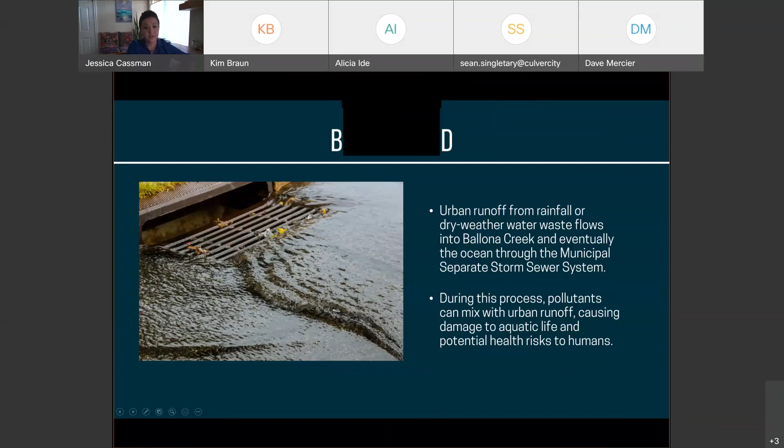And when we talk about stormwater quality or stormwater runoff, what we're also talking about is urban runoff, which results from dry weather flows from things like washing cars and overwatering, but water from these activities makes the same way to Ballona Creek and the ocean just in dry weather. And the pollutants that it picks up along the way are conveyed into the receiving water bodies, and then they become a risk to human and animal life. And it's because of this that stormwater runoff is regulated, like Kim said, from the federal level all the way down to the local level, to protect public health and the environment.

So most of Culver City, as you can see here, lies in the Ballona Creek watershed. The cities and portions of LA that discharge into Ballona Creek are not allowed to cause or contribute to the impairments of Ballona Creek. And so the permit that regulates the discharge is called the MS4 permit, the municipal separate storm sewer system permit. We can think of this as the storm drain permit, but it is part of the National Pollutant Discharge Elimination System permit program.

So what is an impairment, how can we make sure we're not causing or contributing, and how can we show that we are in compliance with our permits? These are all really great questions with a lot of different answers, but all of the cities and portions of LA County within the Ballona Creek watershed came together, asked those same questions, and formed the Ballona Creek Enhanced Watershed Management Program, the EWMP. And the study they did on behalf of the watershed was meant to simplify what it means to comply.

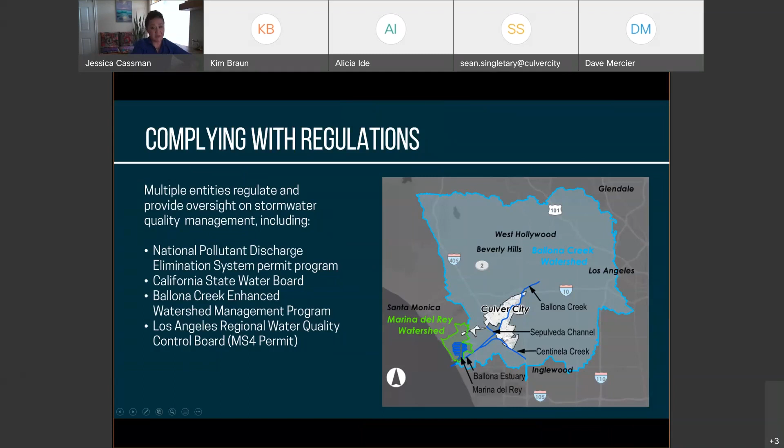And the study determined specific compliance targets for each of the cities and portions of LA County that are members of this watershed. And they determined that if each of the cities meets these compliance targets, they can be reasonably assured of complying. What that means is that for Culver City, the compliance target was set at 99 acre-feet of stormwater volume. So this means that if the city can manage 99 acre-feet of stormwater during a rain event, they can be reasonably assured that they are complying with their permits.

And so the first type is going to be the infiltration BMPs. And what these do is they capture water for infiltration to the ground or groundwater sources. We can also use capture and reuse BMPs, which capture the water and then reuse it for things like irrigation or indoor plumbing or another beneficial use. And then the last type would be treatment BMPs, which capture the water, treat it to a certain water quality, and then release it back into the storm drain system.

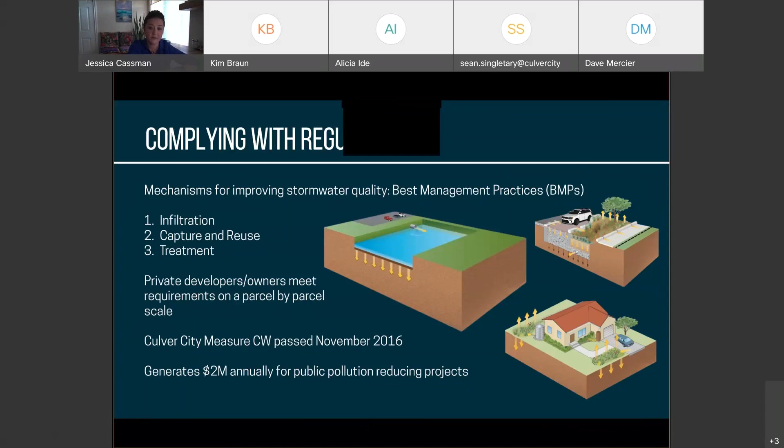And the MS4 permit does require that private developers and owners also implement BMPs on a parcel by parcel scale. But Culver City voters passed Measure CW, which is a parcel tax meant for publicly funded pollution reducing projects, in November of 2016. Some of the ways that the public funding can be used is to keep things like storm drains, streets, and catch basins clean. It can also be used to provide education and outreach activities. It can be used to construct projects, and it was used to develop the Stormwater Quality Master Plan.

Culver City has already done a lot of things to make great progress towards that 99 acre-feet. The Washington Boulevard project is currently in design, set to start construction in January of 2022. This is a public-private partnership with Costco, and it enabled the city to meet its regulatory obligations for the Marina Del Rey watershed. So that's kind of why this Stormwater Quality Master Plan only addresses the Ballona Creek watershed. Culver City is already taking care of what they need to for Marina Del Rey. And as you're probably familiar with, this Culver Boulevard project is currently in progress, and it accounts for a good portion of that 99 acre-foot target.

Both of these projects really came and materialized out of convenience. The partnership with Costco was an opportunity the city recognized as it was in development. And then the Culver Boulevard project, I think, was meant just to be a realignment project, but the city said, hey, wait, we've got this other regional project that if we combine them would be really efficient. So going forward, the city was interested in making more of a formalized plan to take advantage of these types of efficiencies easier and more frequently.

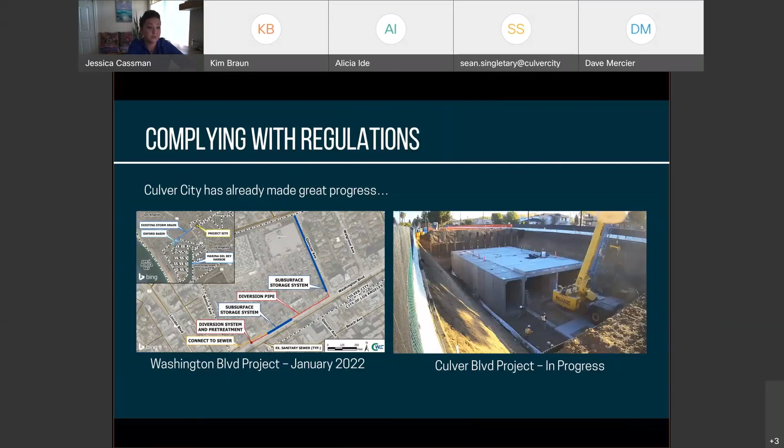And so that formalized plan is the Stormwater Quality Master Plan. Like Kim was saying, it does provide a pathway towards compliance that is specific to Culver City. It provides some decision-making tools about which projects to move forward, some funding strategies, and probably will become some type of regulatory support. And it's also a good starting place for community involvement.

So to start off, the Stormwater Quality Master Plan analysis overlaid a lot of city-specific data. So a lot of this data included soil type, groundwater depth, topography, parcel ownership, and in this way we could find potential project opportunities. It was also used to determine what types of BMPs or projects were best suited for which location. And in total, 441 project opportunities were identified, and that makes up about 69 acre-feet of potential project storage in the public right-of-way.

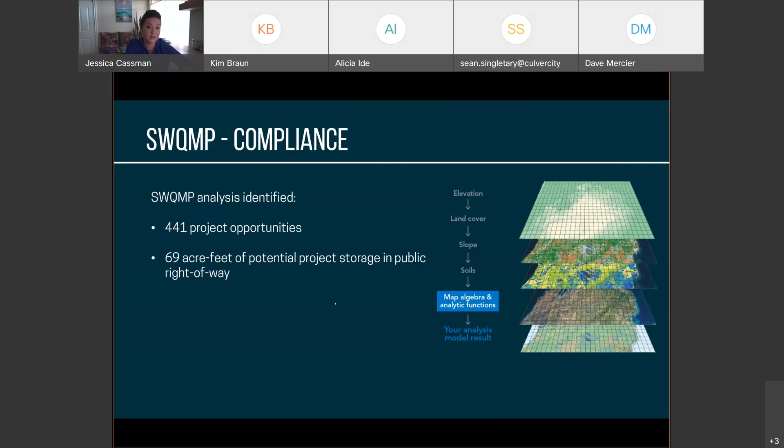After all the projects were identified, we took the projects and ran them through a prioritization matrix. Using site suitability, multi-benefit, and capacity metrics, we were able to give each project a score. And in that way, we could compare projects to other projects, even across the different types of BMPs. We identified 10 regional opportunities. These are larger scale, comparable to the Culver Boulevard and Washington Boulevard projects. Since they're larger, these were mostly located in open spaces within the city, such as parks and schools.

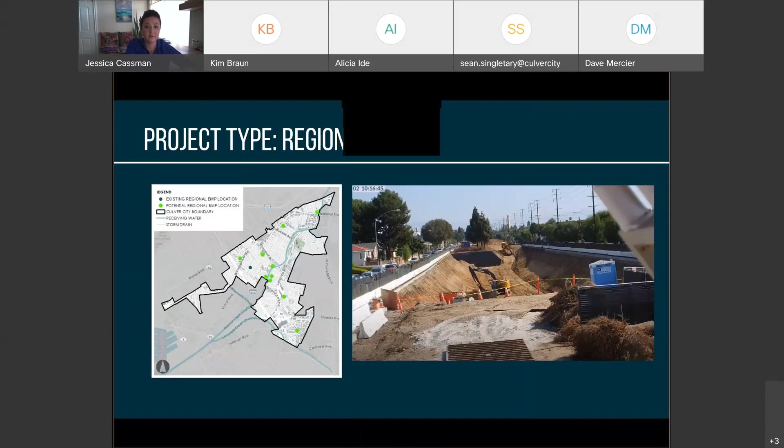We also identified 297 Green Street type projects distributed throughout the city, and these would be linear projects located along the streets in the parkways, sort of like what you're looking at here to the right. And these are really grouped by streets and neighborhoods. So there are 297 groups of these Green Street type projects.

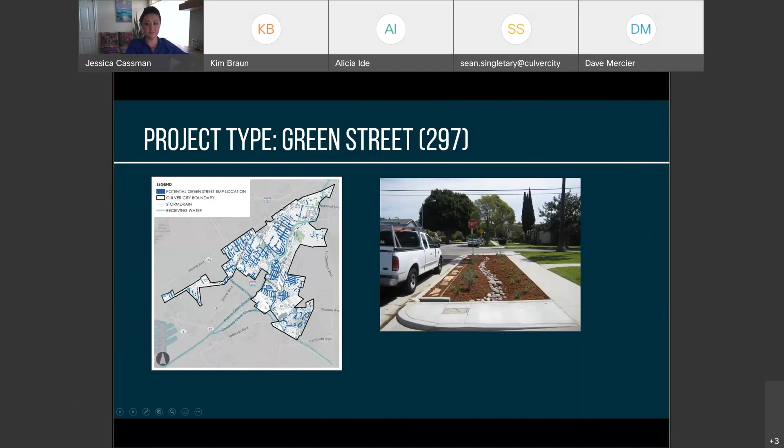And the last type we were looking at were low impact development projects. We found potential projects, 134 of them. In the context of this master plan, we're mostly talking about dry wells. And dry wells are manhole structures with holes in the sides and in the bottom that allow water to be infiltrated throughout the soil profile.

And these are great because they are pretty compact. They don't cause a lot of disturbance. They are fast to implement. They're very cost effective in terms of how much water they can manage, but they are restricted by the soil types and the groundwater levels below.

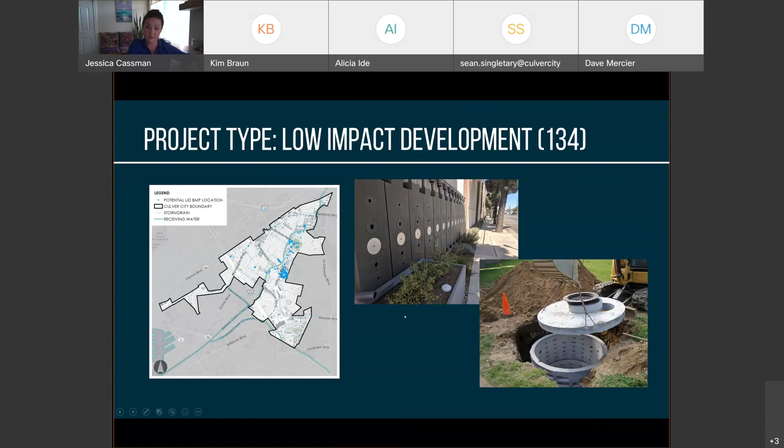So the 441 opportunities that we found were estimated to cost about $140 million. With Measure CW, the Culver City parcel tax, and the LA County Measure W funds, we have about $2.7 million annually for projects. So doing the math, that could take up to 50 years to construct the projects.

And so to make progress, the city would need to determine which are the best projects to move forward and which should be prioritized. And to give the city flexibility, there are a couple of different ways to do that. One prioritization was based on cost efficiency. So which are the best projects to move forward that would fit into the available budget?

And another way would be to determine which are the biggest projects that would get the city to compliance fastest. And then the multi-benefit prioritization identifies the best projects to be competitive for grant funding. Lastly, the interactive dashboard tool can help the city plan internally with other departments to find those efficiencies with co-locations of private developments or other capital improvement plans.

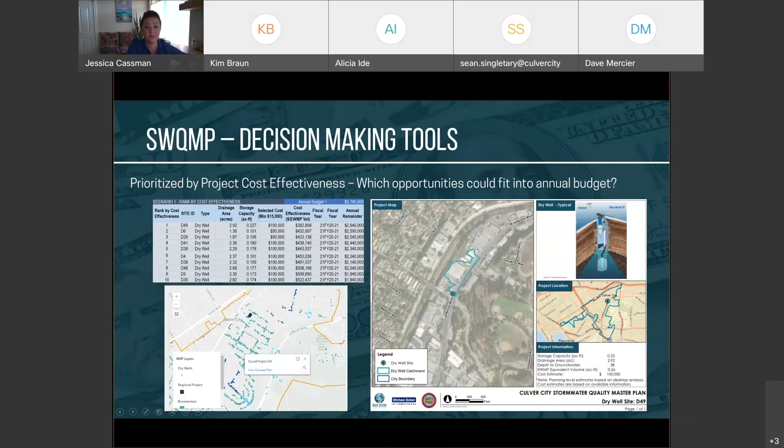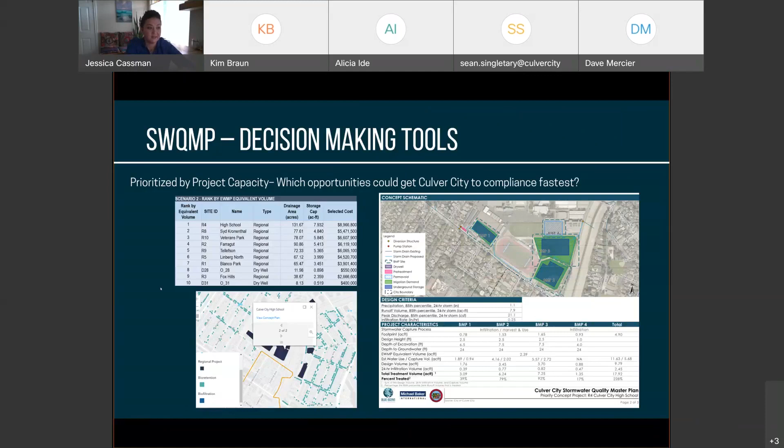We looked at if the project would benefit the Urban Heat Island Index, or if the project was co-located with a known or proposed project within the city, or if it would be helpful in reducing localized urban flooding.

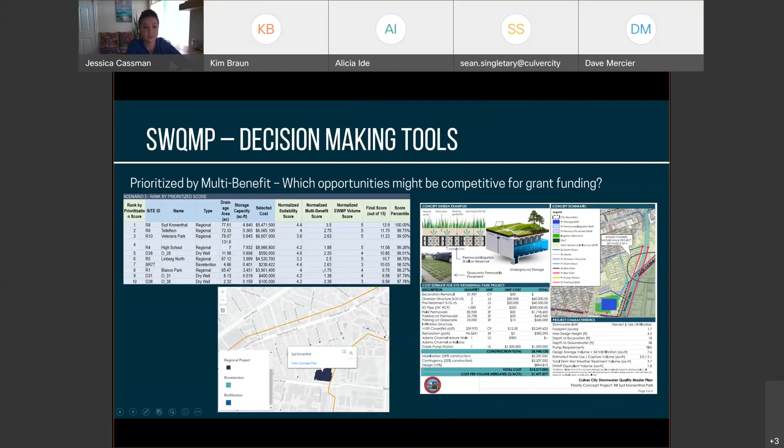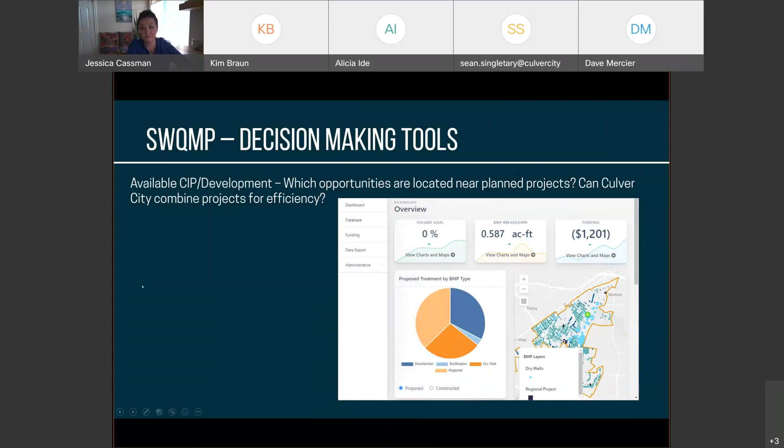So we did mention that the total cost to construct all of the project opportunities was estimated to be $140 million, and that the annual budget is about $2.7 million, which means that the city will need to pursue additional funding. And the city will be able to use the materials developed as part of this master plan to get that grant funding and to pursue project partnerships and to make progress towards their compliance.

So the next steps, we'll be looking to incorporate any public input on this draft master plan, and then look for potential adoption by the City Council in August. And at that point, the city can begin moving projects forward.

And the city will select the projects based on a couple of different things, as the available budget, obviously, but also any planned capital improvement projects or proposed private projects to combine them, and then grant funding opportunities and the community input we receive.

Once individual projects and specific projects are moved forward, there will be more opportunities for public involvement at that point in the feasibility study phase, as well as the construction and design phase.